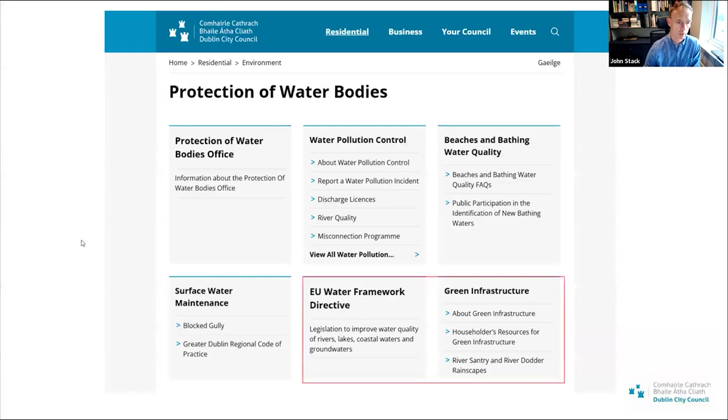So just again, by way of introduction, I work in the Protection of Water Bodies Office in Dublin City Council, and particularly working in the area of EU Water Framework Directive and green infrastructure. So today I'm really telling a story about how I ended up retrofitting SUDS at Macaulay Park in the north of the city. So questions like why there and why not somewhere else? What factors did I consider in choosing Macaulay Park? Well, to answer that, I need to look at the whole river catchment and understand what's going on in it. And that starts with the concept of Integrated Catchment Management, or ICM.

So ICM is about understanding our water bodies in their entirety, identifying pollution sources, their pathways, and their receptors, and then ensuring that measures to tackle these are used appropriately and in the right location. Community engagement is essential, as is a multidisciplinary approach. I am an engineer with a bit of a science background, so I can't claim to be the authority on absolutely everything that happens in a river catchment, and that's why I really advise and advocate for the multidisciplinary aspect of all of this.

So integrated catchment management acknowledges that for programs and plans to be effective, they must occur at the appropriate geographical scale, and in this instance, a river catchment. So it takes a broader, more holistic look at how we use land. It recognises the interconnectedness between different environmental objectives and how they support and depend on each other. So river restoration can help with habitat creation, for example. So it's broader than just the Water Framework Directive, and it includes other environmental legislation.

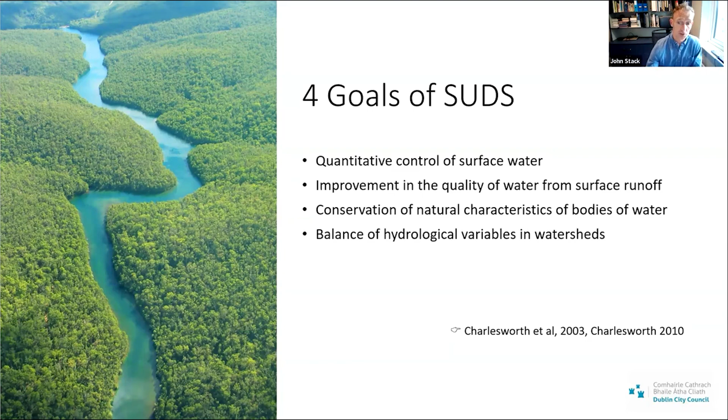And finally, we get to SUDS, or Sustainable Urban Drainage Systems. These objectives in this slide are from Charlesworth et al., and they really cover the essence of SUDS and nature-based solutions. SUDS needs to be about more than water quality and quantity. I think the bottom two are often overlooked when we talk about SUDS. I think we often get pigeonholed into small individual SUDS elements and often lose the bigger picture of what SUDS is trying to achieve. So I think it's important to have a bigger, more strategic picture in mind with this.

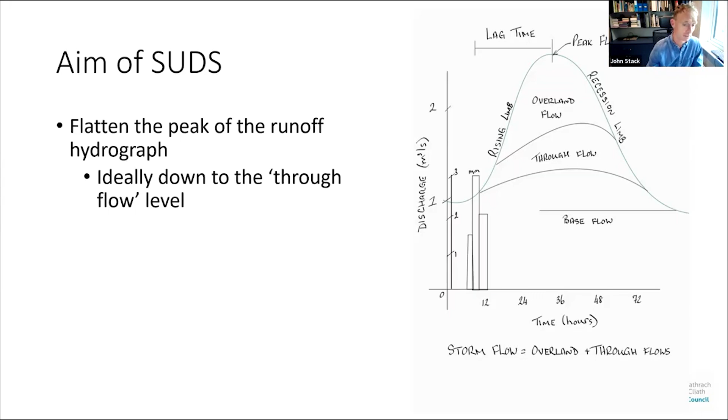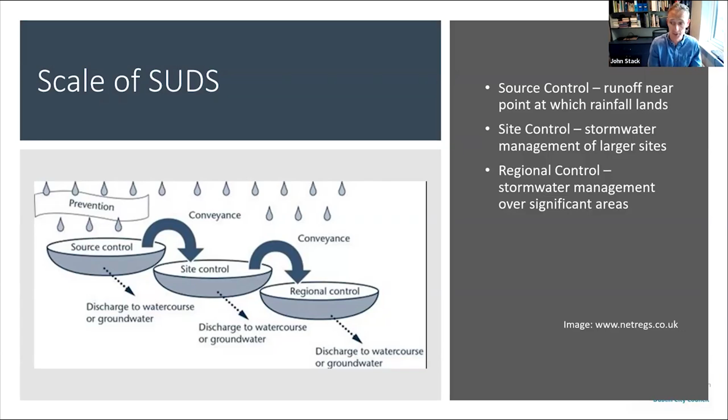Again, SUDS can be applied at different scales, from source control, which could be a green roof on a single building, to site control, which could be a residential estate or an industrial site, to regional control, which comes right back to the idea of integrated catchment management, where you're looking at the entire river catchment. So the remainder of this presentation will look at the implementation of SUDS, and I'll start with regional control and work all my way down to source control. And Macaulay Park is an example of site control.

So the conversation starts with the River Santry, which is about 13 kilometres in length, and it flows across the north of the city. Approximately half of the river is in Fingal County Council's area, and the other half then is in Dublin City Council's area. There's a lot going on in this catchment. There are myriad pressures on the river. Some of them are environmental and some of them are societal. Environmentally, we have poor water quality, we have flooding, which is mostly pluvial. The river is heavily altered. We have habitat loss and invasive species.

The river itself then is a pressure on the North Bull Island, which has numerous designations, including SAC, SPA, proposed NHA. It's a Ramsar site and it's part of the Dublin Bay biosphere. It's an internationally significant bird sanctuary and one of the few sources of eelgrass on the east coast, which is an important food source for migratory birds.

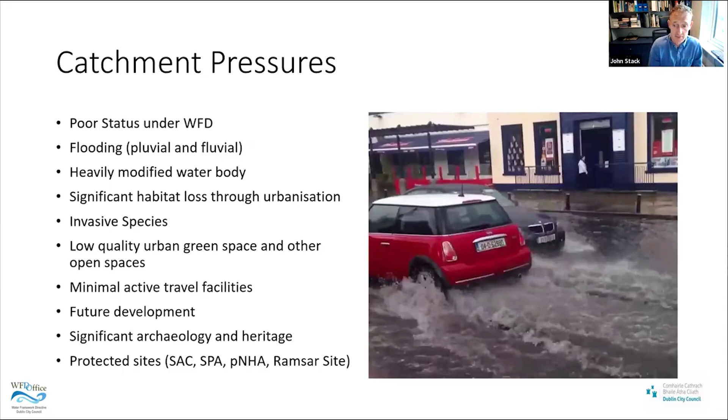Then socially, we have low quality urban green spaces with many areas of the river catchment closed off to the public. Where we do have green space, it's mostly used for playing pitches, although some are also Brent geese feeding grounds. And then finally, it's difficult to travel from one green space to another in a safe and sustainable way. Essentially, it's a car-dependent catchment. We've done baseline archaeological assessment, and it's staggering how much archaeology and heritage there is in the catchment.

So applying the integrated catchment management approach, the first thing we did was carry out a local catchment assessment, which is effectively a study into what's impacting the river. And once we had that done, we've accomplished several other studies to support the information gleaned in the LCA. One of the most interesting studies was the fish habitat assessment carried out by Inland Fisheries Ireland.

We were trying to understand the barriers to supporting a fish population in the river, as there are historic records of people fishing in there. I had always understood that to mean recreational fishing for pinkeens and using nets and that type of thing. However, we observed trout, stickleback and eel in the river, which certainly fills us with joy and optimism about the future potential for this catchment anyway.

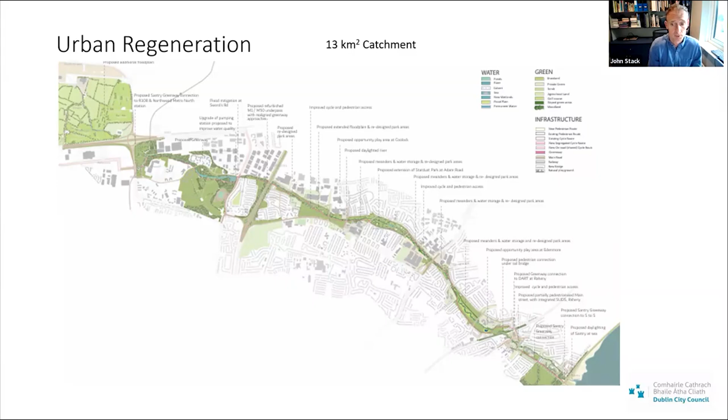And where we're at now is we're at the early stage of what effectively is an urban regeneration scheme encompassing the river from source to sea. We want the people to be able to enjoy the river. We want to provide for ecology as well. And this was developed with significant community engagement. And it's still early days with this.

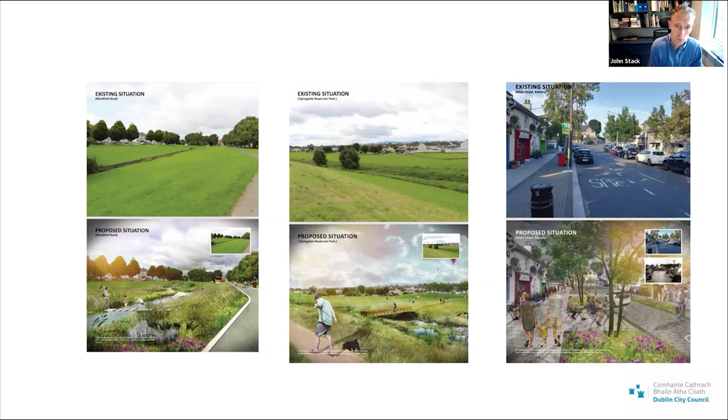And it's important to understand what SUDS structures are supposed to do. All the images so far have shown the nice sunny weather where people are able to interact with the river. But ultimately, our interventions here have a job to do, which is to reconnect that river to a floodplain and allow that floodplain to store water and prevent flooding of properties downstream.

Okay, so I've talked about river restoration, and it's a wonderful concept, but on its own, it's not enough to achieve the objectives we've set for that catchment. There's more work to be done than that. There are approximately 60 inflows into the river, all of them bringing urban runoff from various estates, both residential and industrial, throughout the catchment. So we need to address that poor water quality generated from urban runoff impacting the river.

And then we also need to mitigate flood risk by detaining and slowing the movement of stormwater. So I said earlier that most of the flood risk in the catchment is pluvial. The river only floods at one or two locations within the catchment, but we get a lot of spot flooding and localized flooding elsewhere in the catchment. That's simply as a result of stormwater not being able to drain away quickly enough. It's not reasonable or feasible to store all of that water within that floodplain that we're trying to create. So it's necessary for us to find spots throughout the catchment where we can temporarily slow and intercept urban runoff.

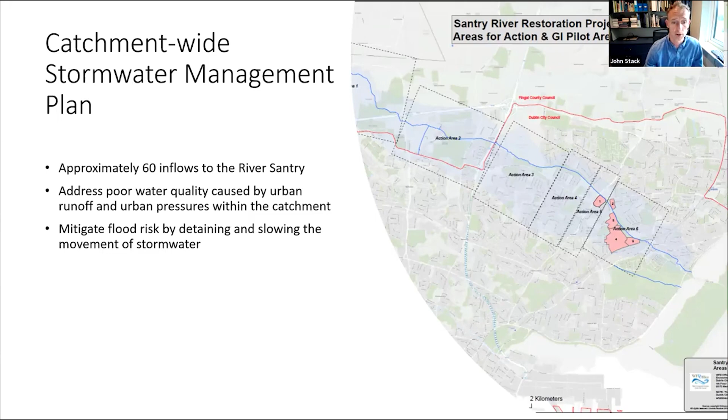And that brings us to Rainscapes. So while the river restoration scheme is our regional scale of project, we're now looking at a site scale here, which is your typical housing estate in the city. So Rainscapes is a SuDS retrofit scheme. It's based on the hydrology of that specific catchment. We've used the 1 in 100 year design storm for flood control.

And then from a water quality point of view, our objective is to intercept what is known as the first flush, which is the first maybe 10 or 15 minutes of a rainfall event. If we can intercept all of that water, we will probably remove the majority of pollutants entering into the river via that pipe.

And that is how I ended up in McAuley Park, or McAuley Ribh as I call it. The site comprises McAuley Road, Ribh Road, and Lein Road. And within that, there are 2 large-ish urban green spaces and 5 cul-de-sacs. And what we've gone and done is retrofitted rain gardens, swales, permeable paving, and tree trenches. McAuley Park is now nearing completion, thankfully.

What's also useful about this is it has a very simple drainage network. There are 2 stormwater sewers in this catchment. There's nothing draining into them from outside the catchment, so it's easy for us to put in monitoring equipment and study the performance of our intervention and show just how it worked.

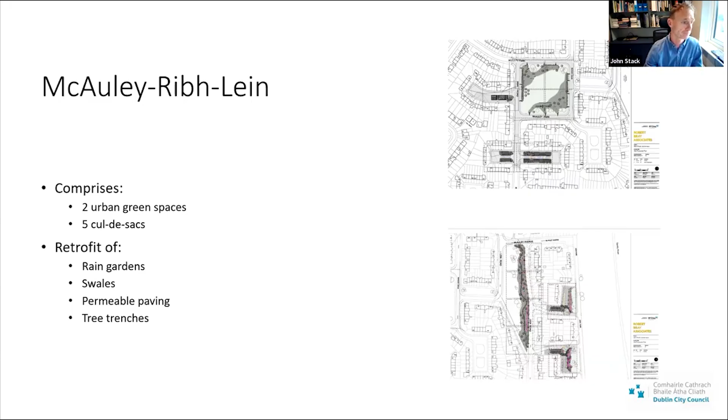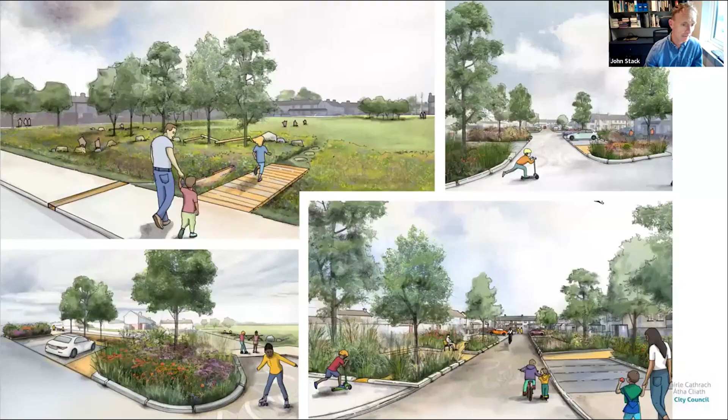So again, I like the idea of photo montages, so we developed these so that we could go out to communities and show them exactly what it is we're trying to achieve. I don't think there's much point in bringing technical drawings out to community engagement because they don't understand them and they shouldn't be expected to understand them either. But if you show them visuals, they can have a conversation. Again, these are at street level of what we were trying to achieve.

And just to give it a little bit of context, this is one of the biggest cul-de-sacs in the scheme. It's about 20 meters wide and 60 meters long, approximately. And it is entirely concrete and tarmacadam. There's random parking of cars. We get a lot of complaints from residents here about just the haphazard nature of parking, etc., because there's space to do it. And we would hope that it would end up looking something a bit like this when we're finished.

Through consultation with stakeholders, we agreed not to reduce the number of parking spaces they were theoretically able to have post-construction. So we've retained that. They can still park their own cars there, but we would hope to deter outsiders, we'll say, from using this as a day park for themselves heading into town.

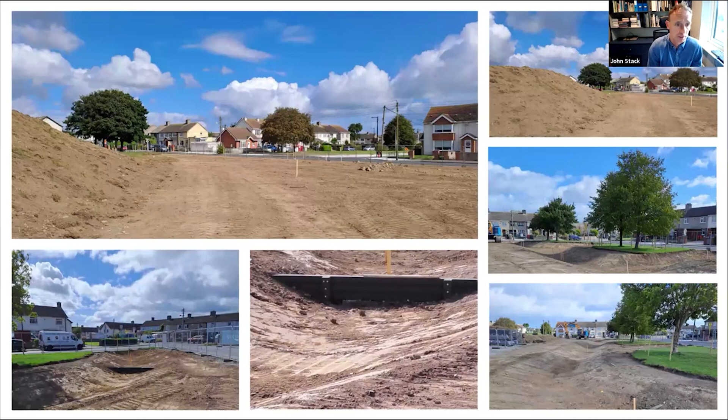We started construction last October. These images here show the excavation of the swales around McAuley Park. And then you can see the introduction of some weirs as well to help slow the flow. What we don't want is to just create a channel that water flows through rapidly and then back into the river. We need to slow it down and retain it and allow some of it to soak into the ground and some of it to be taken up by plants.

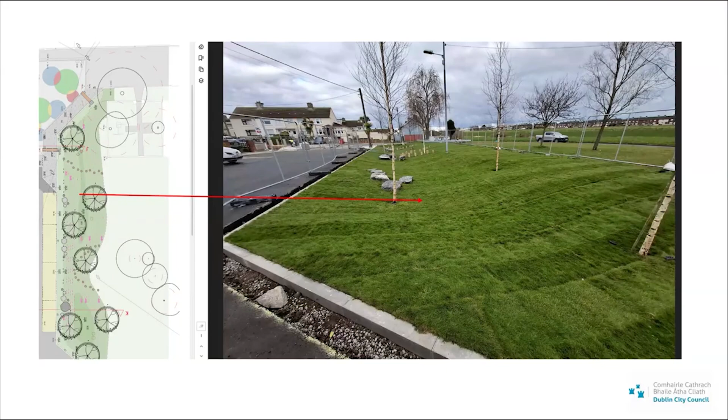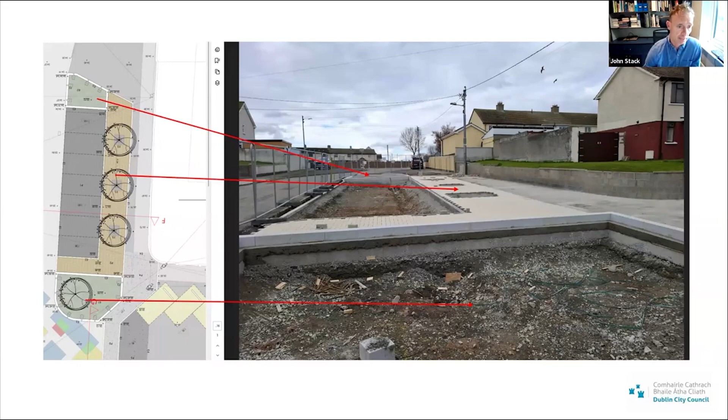And then this is more of a soft engineering one. This is the McAuley Park. Again, you can see the delineation of the swale. It hasn't seeded yet. We had to use some turf for this under the informal play features. We had hoped the grass would grow much faster, but as a result of our very dry spring and summer, the grass hasn't grown as quickly as we hoped it would.

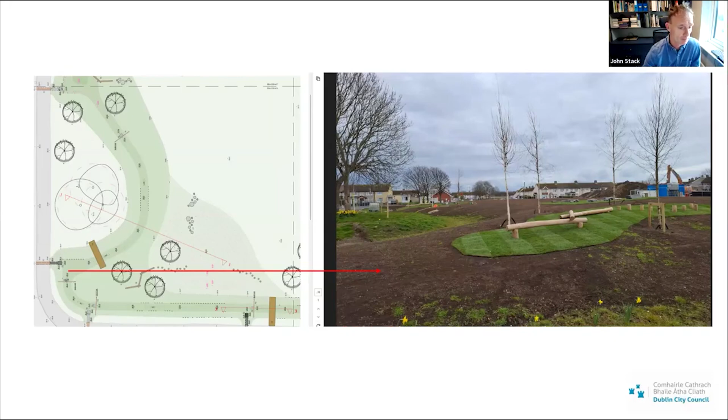And then this is one of the most complex aspects of the whole scheme. Again, this is that wide cul-de-sac that I mentioned earlier, the 20-meter by 60-meter cul-de-sac. There was an interesting conversation with residents here in that they didn't want this structure, they just wanted more parking bays. But I argued that if I did that, I would be sending a direct message to people that this is public parking space for anybody to use.

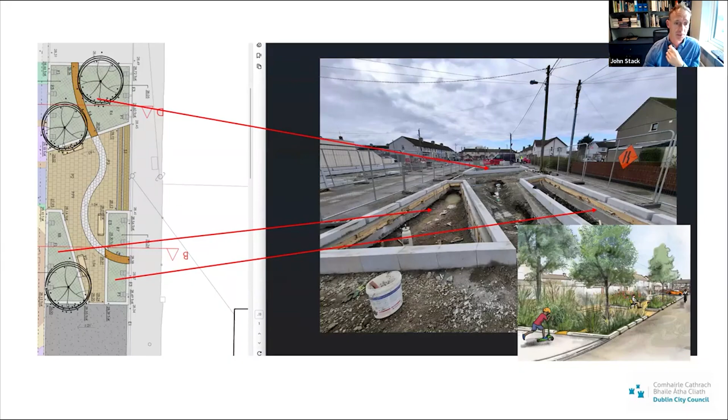So instead, we went and created a place for recreation and for social gathering by the people living in this estate. And I think it has worked out very well, bearing in mind that we were still able to retain the parking spaces that residents needed themselves.

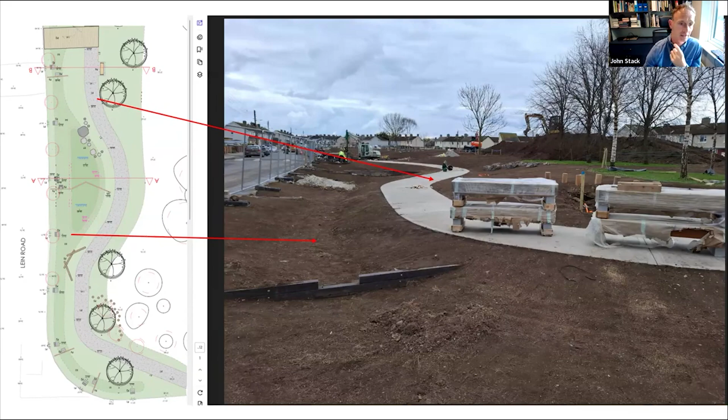And then finally, you have the long linear park on Lein Road. So you can observe the footpath, the swale, some of the play features, and the various weirs. This has a long cascading series of weirs all the way down the road. And by far, it'll be the most dramatic and aesthetically pleasing element of the whole scheme when it's completed.

And now that we're getting towards the end of our project, it's a good time to look at some before and after pictures. And while these look great and everything, what's more important is that residents, including the people who were skeptical initially, they're now thrilled by how this has turned out.

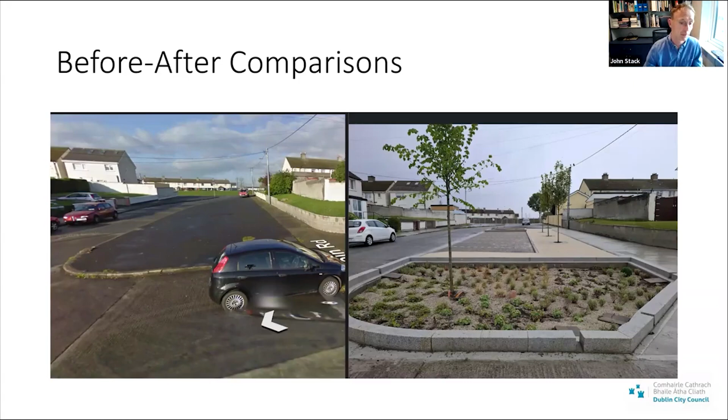Despite us bringing out photo montages and having lengthy discussions with them, lots of people still couldn't understand what it was going to look like. So there was still some skepticism and nervousness, we'll say. But now that it's there, they've been overwhelmingly thrilled by this.

Again, this is another green space. We've taken what was just tar macadam. Now, actually, it's likely 30 or 40 years ago, these were green spaces as well, but were infilled for easy maintenance or something like that some time ago. But we've now turned them into a much more usable, greener space.

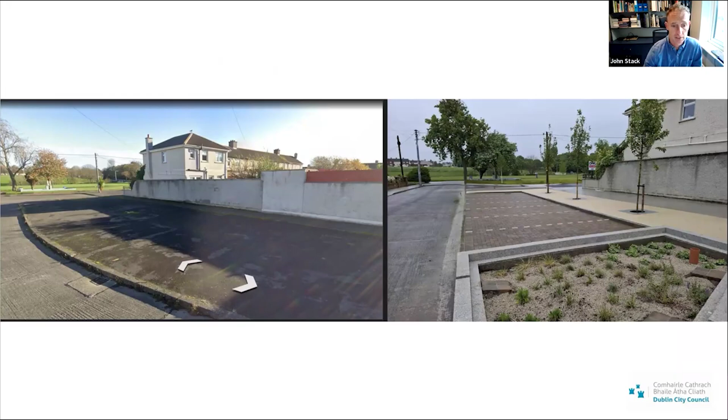Again, all of these parking bays are porous pavement, so any rainfall that flows onto or into them drains down underneath this into a French drain system where it's purified, and then it can discharge into the Santry River, which is at the background of this picture.

But my vision is to just literally go from estate to estate throughout the entire catchment with this type of intervention over the coming years.

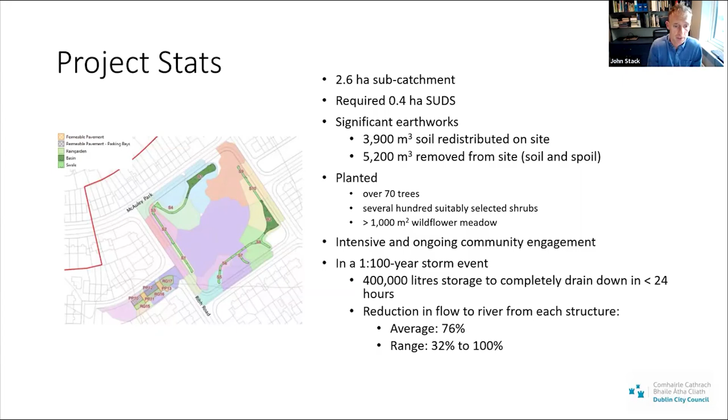And that's 400,000 litres of water that won't flood somebody's house or will reduce the load on the river that creates a flood risk further downstream. So when I look at all of the individual interventions, the average reduction in flow to the river from each structure is about 76%, and the range is 32% to 100%. And what that means is the quantity of water that flows into any one structure, and that could be anything from the swales to an individual rain garden, it ranges from 32% to 100% reduction.

And then finally, so McAuley Park was the site control that I mentioned. But then moving on briefly to source control, there's an awful lot that individual site owners can do to contribute to this type of work. So while I'm retrofitting SUDS into residential areas, there's an awful lot of land that's privately owned and in which I have no jurisdiction to do anything.

Now, if these sites are brought forward for development, planning conditions will require SUDS. And I have seen a significant uptick in the quality of proposals from some developers in recent times, but I think there's still a lot of work to be done on this whole area. But then what happens to sites that are not brought forward for development? There's scope for retrofitting in these.

And then there's this. In the local authority, all of our work, our project work anyway, it must align with various legislative and policy objectives. But we have to recognise that we want people to be able to enjoy living in the city as well. And that brings up the idea of placemaking, which prioritises people over infrastructure. And infrastructure must work for the people. So it's difficult to deliver a plan that doesn't advance Dublin City Council's objectives. And by our objectives, I mean what's in our development plan or what's in various action plans that we're all signed up to. And they really drive the work we're doing.